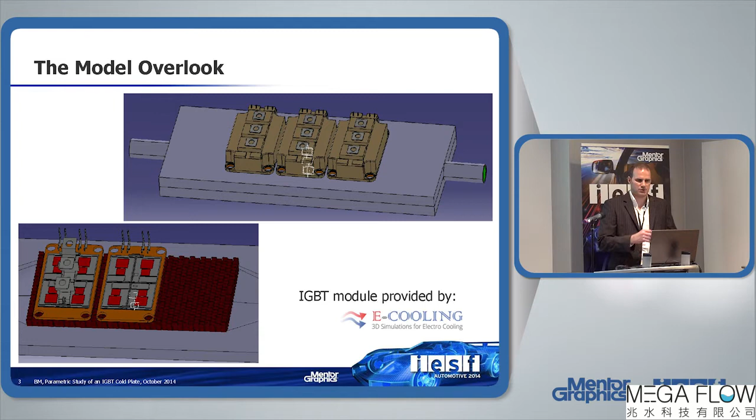These are the fins of the cooling, which I will change in numbers and sizes. Just a quick look at how detailed the IGBTs are. So we have the silicon, the solder, copper, ceramic plate, another copper layer, solder or TIM material, the base plate, and then a small thermal resistance as a TIM material to the cold plate.

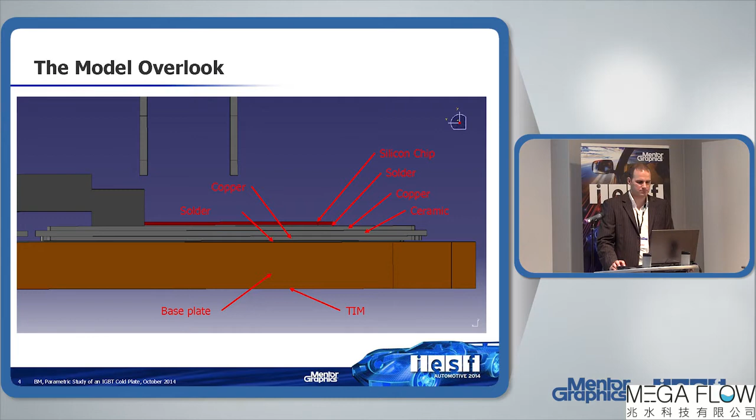So we start with the triple IGBT module on the cold plate. We can change the fins and pins in shape and size. The cold plate is just simple aluminum. You can change the material if you like, but that's just for the demo, as well as it's just water as a coolant, so no special coolant liquid.

The IGBT chips altogether have 690 watts, so 3 of them with each 4 chips, so per chip it's about 57.5 watts. For the diodes, it's 480 watts, or 40 watts per chip.

The IGBT module consists of various materials, as you've seen in the structure. I only use the local mesh for refining the region where the fins and pins are in the cold plate, as well as for the IGBTs, in order to get a slightly finer mesh on the structure of the IGBT.

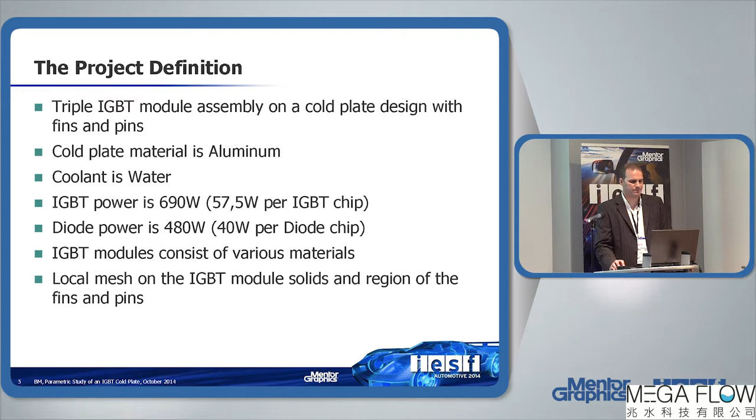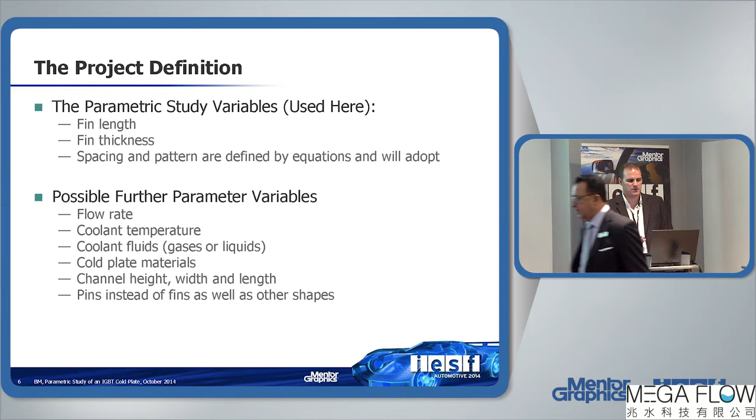In this parametric study, I can basically change the fin length, the fin thickness, the spacing, and the pattern, which are defined by equations. So if my fin gets longer, I have to have a bigger distance between them. Otherwise, if it's very small, I can have one long one. It doesn't really matter — there's some kind of equation behind it that automatically rechanges that.

You can go into more detail and make it more advanced in the equation. I just put a factor in there so it gives a bit of a gap.

You can also change the flow rates, you can change the coolant temperature. For example, if you have a cold start or if you're driving for a long time, the coolant isn't 20 degrees at the inflow, it's something around 40 to 60.

You can change the fluid, of course, gases or liquids. You can cool it with air, though of course that's not as efficient. And the cold plate material, of course you could use copper, but then it's getting more expensive.

The channel height — the width is about the size of the IGBT, so it doesn't really matter if you make it any bigger. But the height matters, to get more water through or to squeeze it for higher velocity through the channel.

The width, the length, the pins instead of the fins — in my study I just used the fins. I can simply switch by activating or deactivating the other part, and then run the same amount of variations there. You'll see it in a second.

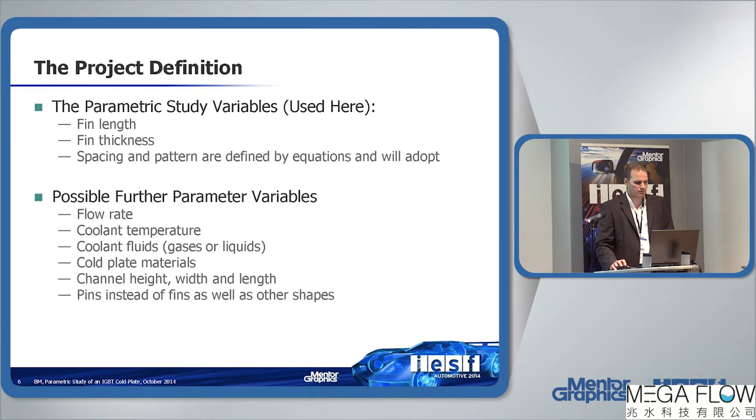They're both linked to one parameter, so if I change that parameter, both will change in size and also in distribution. And of course, you can also use other shapes than pins and fins — you can have ovals or whatever.

For the setup, the model setup took me less than 50 minutes. It was more like hiding the components so I could get to the layers in the IGBT to apply the material, or finding them in the tree of Catia.

And that's basically it. For the parametric study, I simply define which values to change, and then it runs through all these values, automatically creating all the projects that are possible — all the combinations.

So the mesh size for the finest fin model was about 2.5 million cells, and it took me about 9.5 minutes to mesh the model. The one for the coarsest fins, with a much larger distance between the fins, was just about 600,000 cells with 1 minute 15 seconds to mesh.

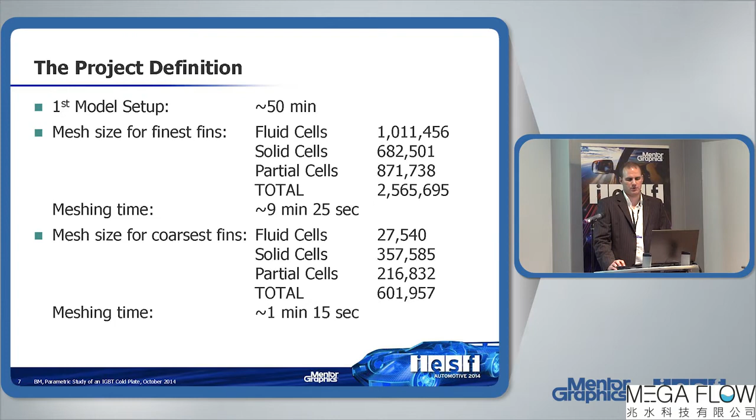And that's the important part. The meshing technology is a Cartesian mesh, for those of you who don't know it. With a Cartesian mesh, you would think you get stair steps in the geometry if it gets too complicated, but here comes the immersed boundary layer into play. So if I have anything angled, with a fillet, or more complex, you have partial cells which are part solid, part fluid.

So this is the fluid area, the area where the flow enters here. You see here one fin, there's another fin, and that's the aluminum casing of my cold plate.

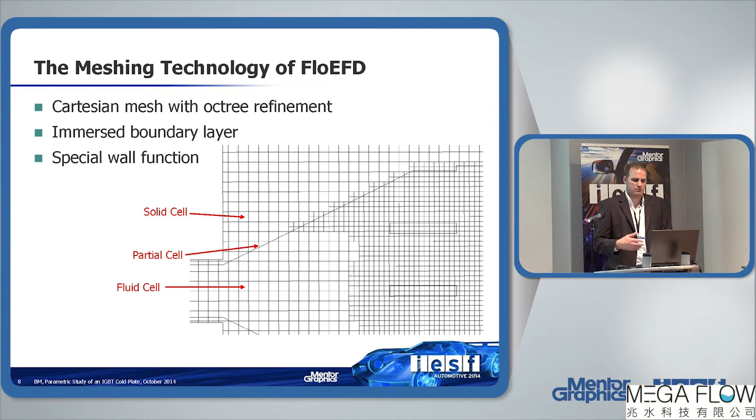We also apply a special wall function, because you probably noticed there's a very rough cell size. If you know traditional CFD meshing tools, you resolve the boundary layer that way. So we have a special wall function that takes into account whether we resolve the boundary layer with the mesh or not. If we resolve it, we calculate it directly. If we don't resolve it, we have a wall function for that. The boundary layer model is pretty much detailed and researched, so you can apply certain equations to work with heat transfer, friction, and so on.

Let me get to the demo. So this is my model. You can see we have the IGBTs on top, so I'm going to hide them.

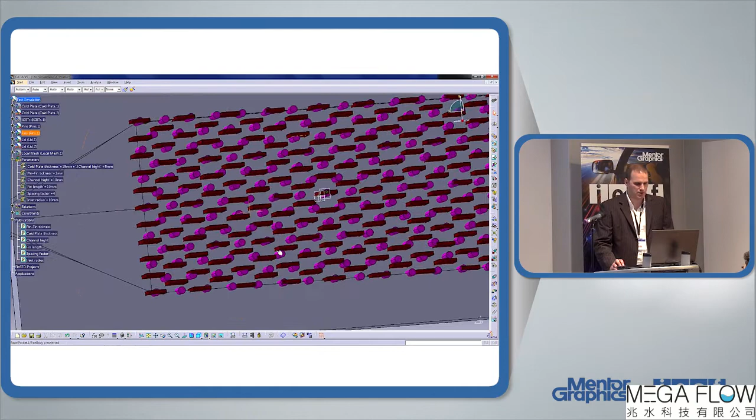This is the top part of my IGBT cooler, and this is the lower part. You can see here both of them are still shown, so you can see the pins as well as the fins. They're two separate parts, so I can activate or deactivate them with the parameters.

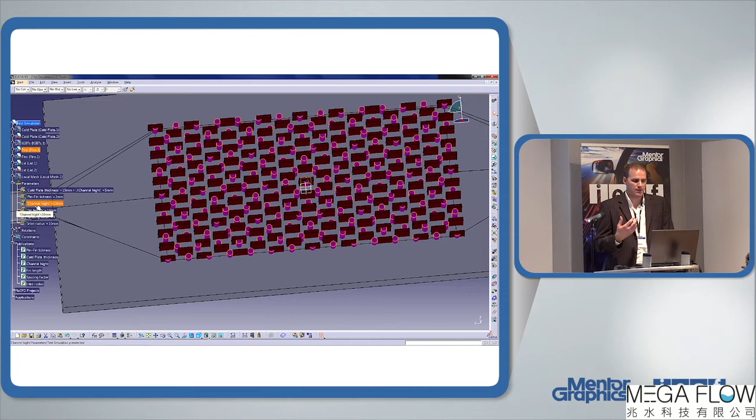Now I have a set of parameters here which Catia can provide. I'm not that familiar with NX and ProEngineer, we have colleagues who are much better with that, but you can probably define similar tasks there. These parameters are in the main product, and I made them public in order to access and change them, so all the parts which are in some way related to this parameter are linked to that.

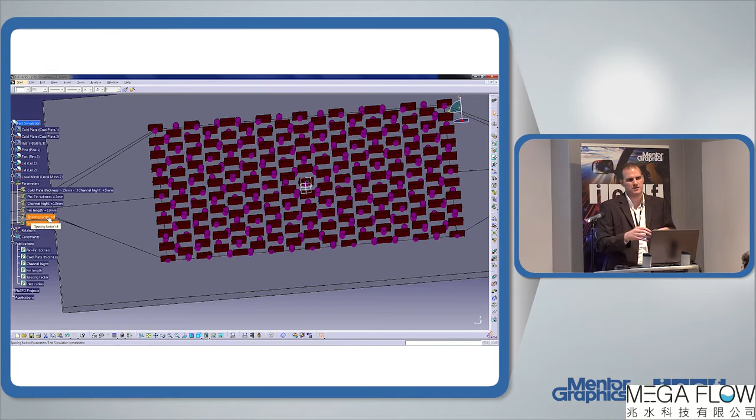So in an equation, if it says 2 times the fin size, it will use the parameter. If I change it here, for example the fin length, it only affects the fins now, because the other ones are radius or round. So let's do, instead of 10, let's make it 20 millimeters. It gets red, so I have to update the geometry, and you can see it automatically changes.

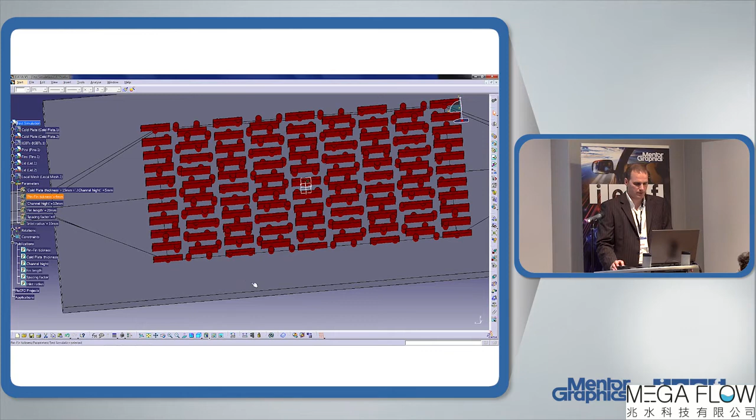If I change the thickness from 2 millimeters to, let's say, 4, you'll see that the pins also change, because they refer to the thickness as their radius. So of course a 4 millimeter radius would be an 8 millimeter diameter then. Update, now both are red, so we update it again, and we'll see how the pattern automatically changes.

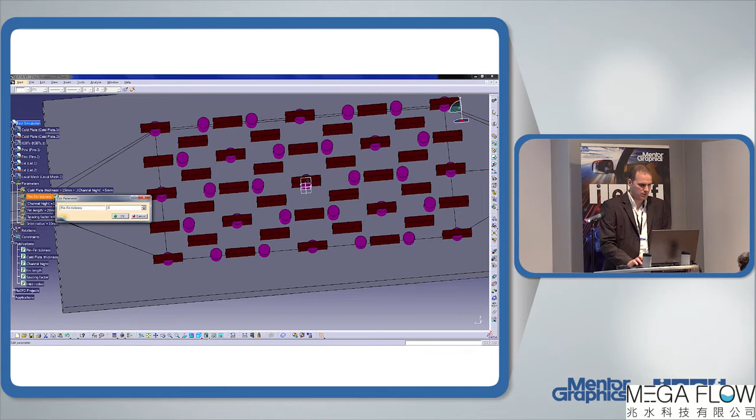It really goes only from that edge to that edge, and from these boundary areas here to the other ones. Depending on what I set, the shapes and the amount of fins I create will change. The finest one was 1 millimeter, and for the length we had 5 millimeters. So if I update that, you'll see it's very, very fine. You'll see later in the results how that behaves on the flow, on the temperatures, and so on.

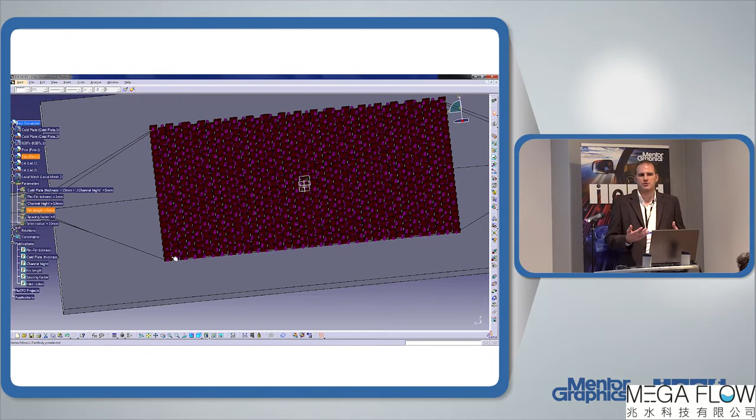So with this, you can basically reproduce any geometry. You can change anything, create a kind of porous matrix. There are some mixers with diagonals, rods relative to each other. You can place these things, and if you place it once, you can pattern it. You can change the dimension of the diameter of these rods, and this way you can really create your own structure as you like it.

Now these parameters are basically what I'm going to change. So let me switch to another project where I already have that defined.

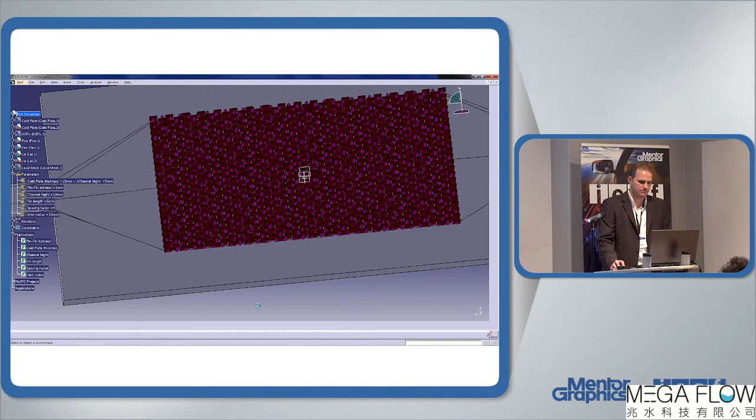Here. So this, you can see, is the same assembly. In this case, I deactivated the pins, so you can see a small bracket here that tells Catia that the component is deactivated.

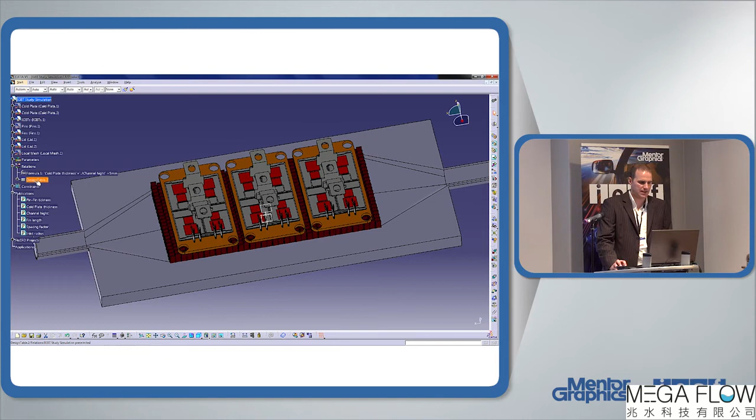I included here a design table. In this design table, I referred to the parameters that I might be able to change, so this design table I can control from the parametric study. Now, in this case, I cannot control the parameters here anymore because they're fixed by the design table. I would have to go into the design table and change it there. That's why I showed it before, where I can still easily change them.

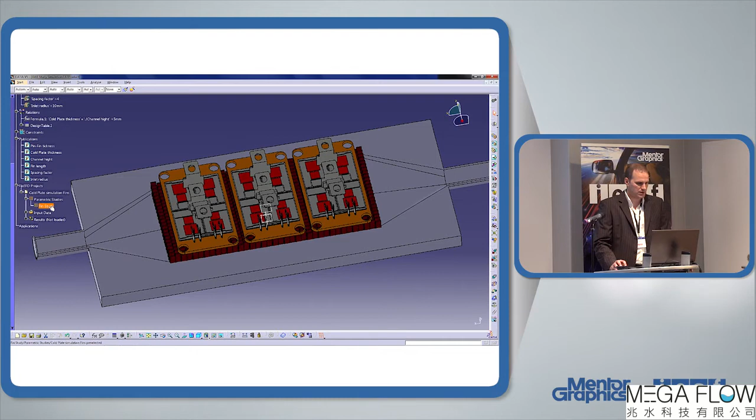So the parametric study is here in my project. You can see your parametric studies, and I named it fin study. So let's go in here.

Here you can see several of the parameters. You have the fin length, you have the component activation state for the pins. No, that's the fins, not the pins. It's just a Boolean value: 1 is active, 0 is deactivated. So that's why the pins are not shown.

You have the pin or fin thickness, the diameter or the thickness of the fins. And for example, I can also change the volume flow rate. Or if I like, just add another parameter for the volumes, let's say boundary condition, inlet volume flow, temperature.

Click OK, and I have a temperature in here too. And I can change, for example, the temperature, make that from 20 to 60 Celsius for the inlet in, let's say, 5 Celsius steps. Okay, you see automatically it creates all these combinations.

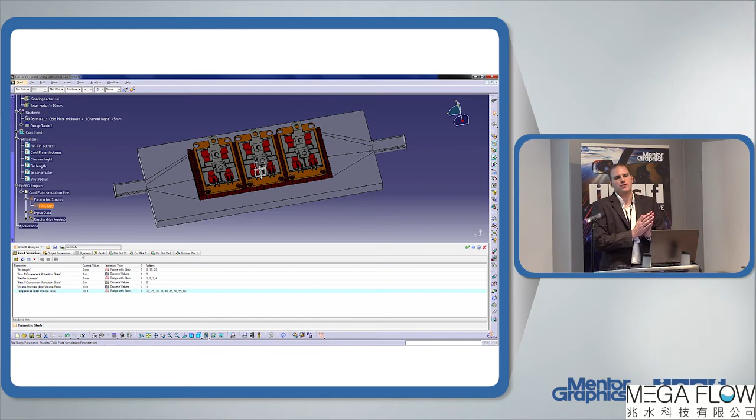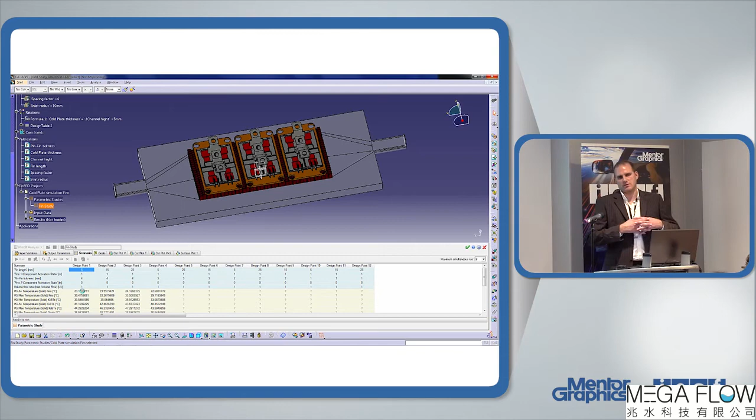As soon as I click on scenario, it will create all these - I have to update that. You will see how the bar slides down because it creates more and more combinations. Here you see all the parameters that I have chosen, and they will add another one for the temperature.

And the more you create, of course, the larger gets the matrix. And now we have, I think, like 6 parameters: 3 for the length, 4 for the diameter, plus again 5 or 6 for the temperatures. So it's a huge matrix that it's now creating.

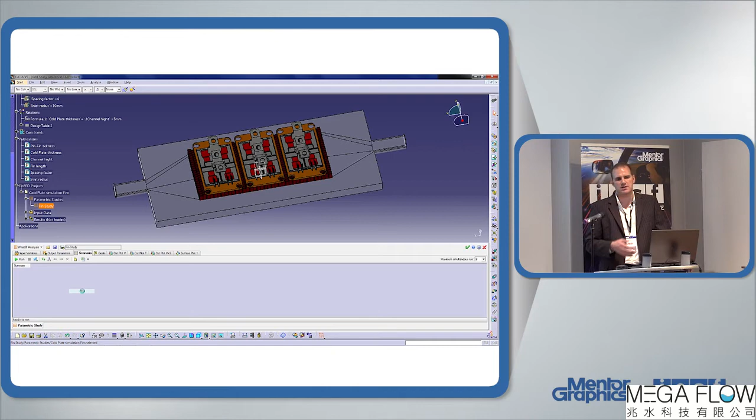But as long as I have enough time, or if the model is small enough, I can still run it just in series. Or if I have enough solver licenses, I can run them also in parallel, if I have enough computers to just distribute it on.

Here's my matrix, and you can see it's really huge. It goes up to 108 design points.

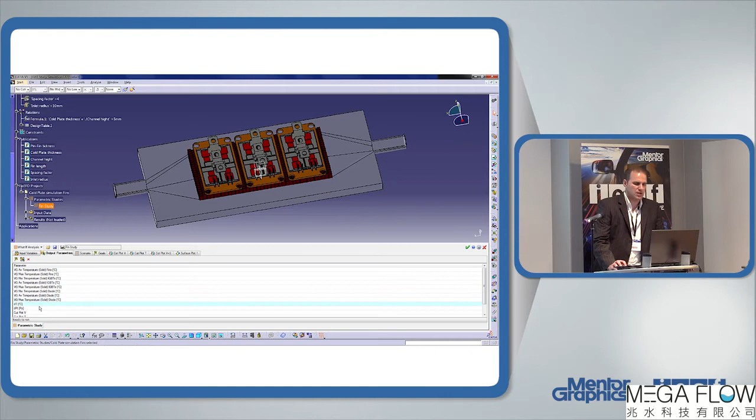So other parameters that I want to know are, for example, my goals, such as the solid temperature for average and maximum of my fins, the IGBT minimum, average, maximum, as well as for the diode min, max, and average. I have my delta temperature from inlet to outlet, as well as delta total pressure. So I know exactly what pressure loss I have.

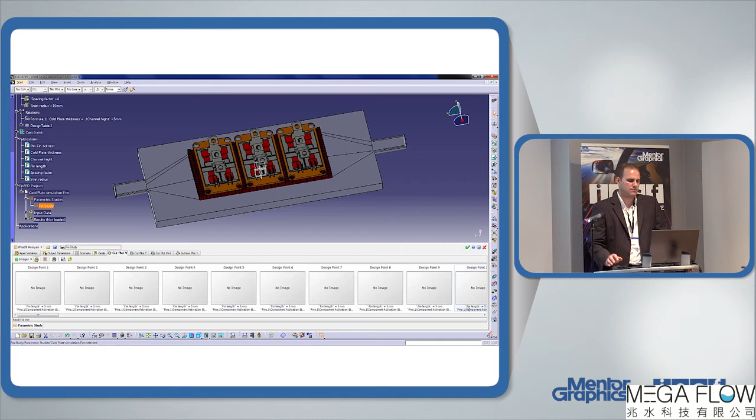I can also add some post-processing plots, which I already have defined in advance, so which layer and so on. And if I go to the plots, it will update the images as I calculate. The same goes for the surface plot, or in case of my goals, it takes a second.

You will see for each of these goals, I can change them into a chart where I have bar charts. You can see how they compare to each other, if it's higher or lower. And of course, I can also export it to Excel and work from there in more detailed graphs and so on.

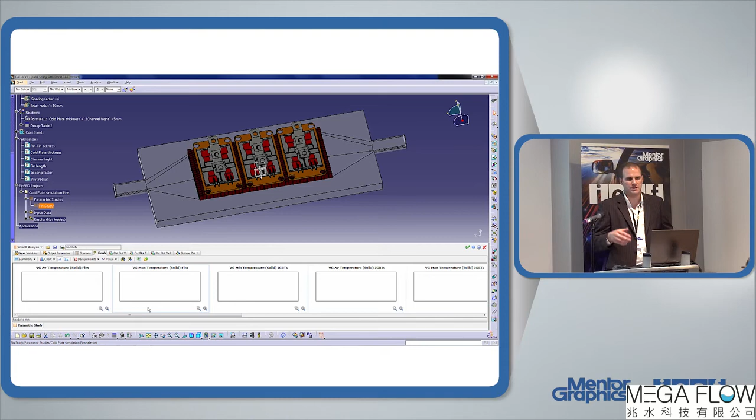So at this point, I would basically say, okay, that's my scenario. I can run it, or also allocate different computers to each scenario, and then just start the calculation.

If someone uses FlowMaster here, you can also use this basically as characterization of my cold plate. If you have a fixed cold plate and want to drive different temperatures and volume flow rates, you can use it in order to characterize it and put it into a full cooling loop in a car or airplane or wherever you want to apply it for valves, pumps, or whatever.

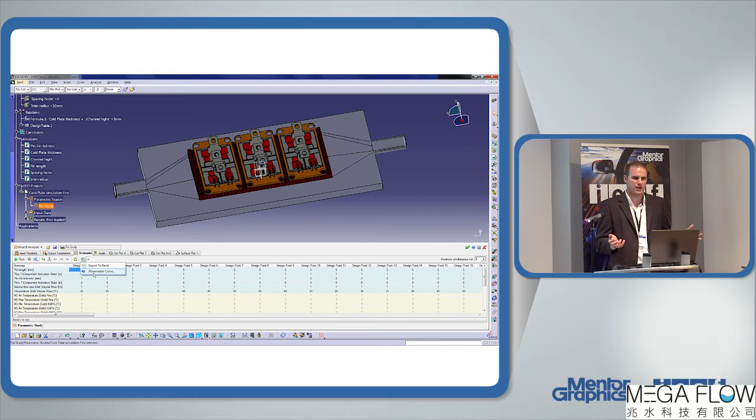This way, you get kind of a characterization of a 3D component which you can plug into one system simulation and run through all the variations in temperatures. Depending on how the system behaves, it takes the actual parameter of the component in the system simulation.

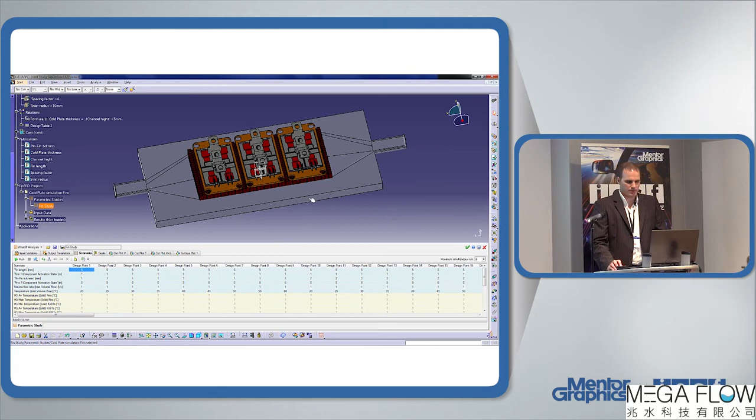Okay, so done with that. Now let's have a look at the results that I created, not for this huge model.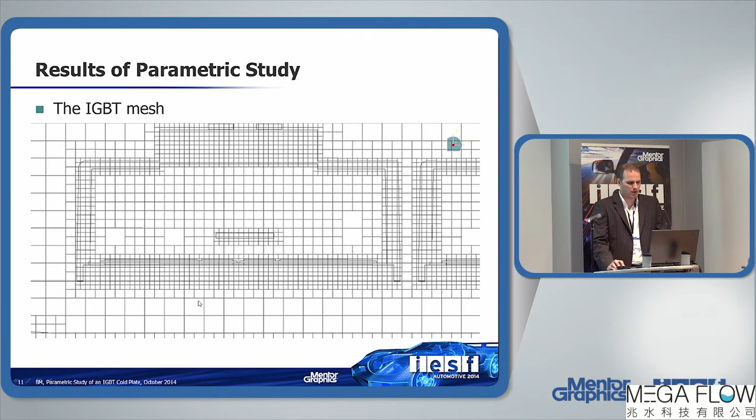This is my IGBT mesh. You can see here's part of the fluid in here as well as around it. And if I zoom in this area, you can see the structure of the mesh. You have here, that's a copper layer, as well as this one.

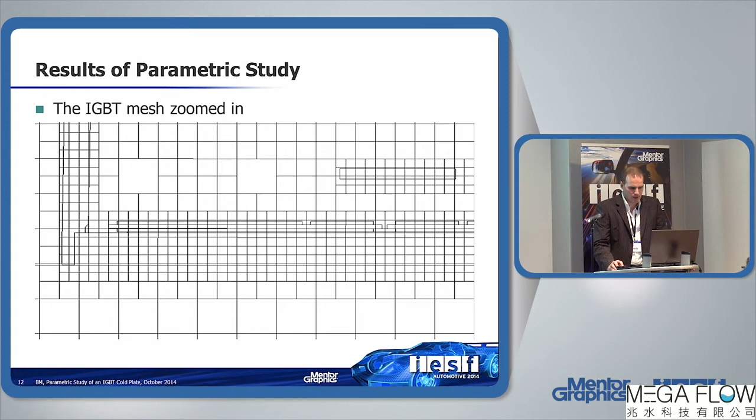The IGBT chip here in that case is in a plane further behind, so you don't see the IGBT chip, but you can see the ceramics here, another copper layer, and a very thin solder or tin material.

You don't really have to resolve the thickness because the partial cell takes into account several layers of materials, different materials, and since it's linear behavior of heat conduction, why do you need to resolve it in that detail? It's just linear, there's no reason for that. Of course, if there's a heat source in the center, it behaves differently, but it's mathematically describable.

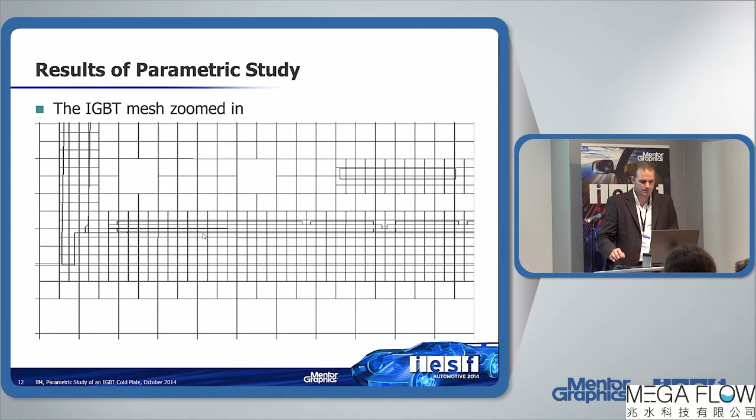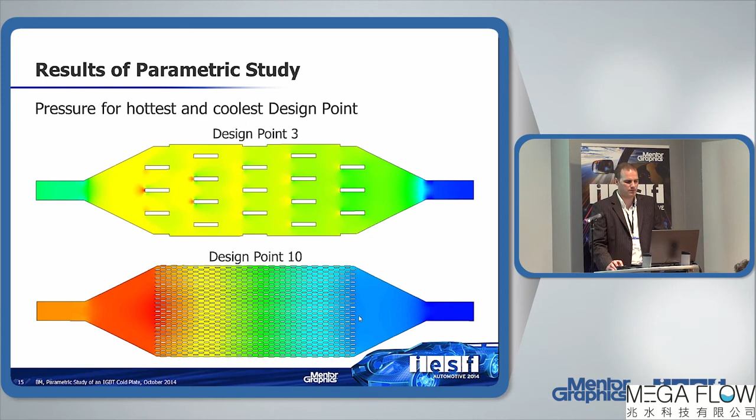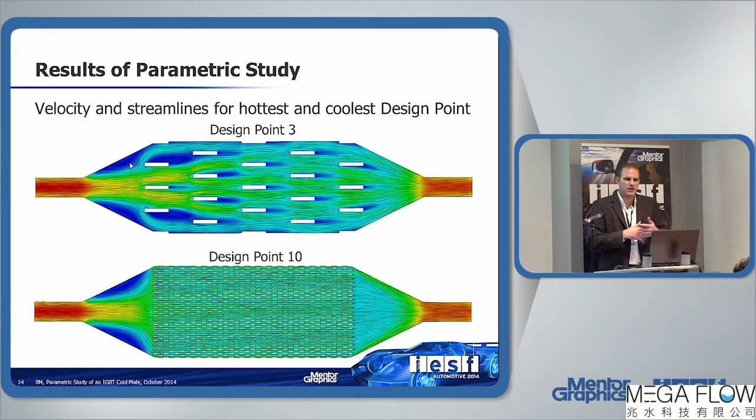Here's another one with some streamlines. Or if we want to go into the pressure, you can see the stagnation pressure on the tips, or how it stagnates in front of all the fins and then reduces slowly over the length of that. Of course, there's some improvement you can make at this point, as well as if you go back to the velocity in this area here, where you have recirculation, you can optimize it, make the expansion not so hard but more slow, or make a fillet in there.

So a lot of optimization you can also do there. That's just a very simple example, so I'm not a perfect designer in that way.

It's 1 liter per second, and the model, from the straight line, is 20 centimeters and 1 centimeter thick, so it's really like flowing through in a second. So the temperatures here are very low—probably reaching up to 0.3 Celsius just by passing through from one side to the other.

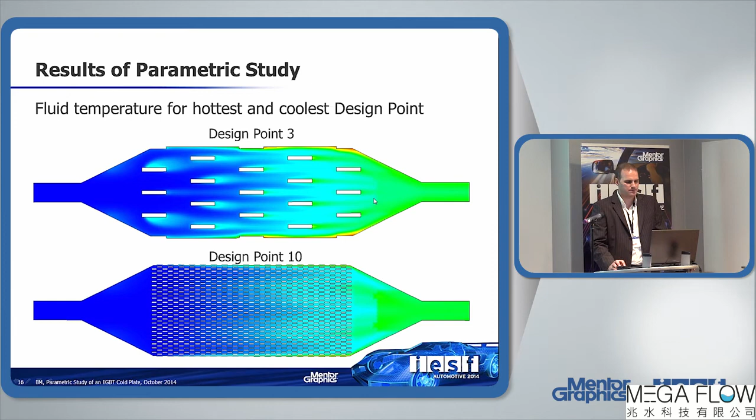But if we look at the IGBTs now, you can see that with the very coarse distribution of my fins, we have at the beginning where the temperature is low and speed is still high, some stagnation, and this IGBT is hotter also because it sits between the two, and therefore is kind of crowded from both sides and can heat up a little bit more.

The other one has a very good distribution of the fins, so good heat conduction into the whole assembly as well as into the fluid, better spread of the temperature, better distribution. In this left case, you would probably face some earlier failure in the center IGBT compared to the left and right one, while in the other case they're all equally well loaded with temperature.

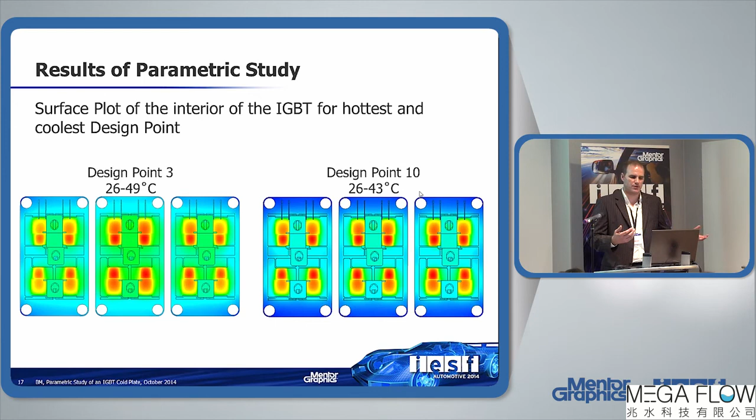And it's not much colder, just 6 degrees Celsius colder. You can optimize it, as I said, with flow rates. You can also apply a pump curve at the beginning in order to make it more realistic to a pump that you'd have in front of it, so the pressure changes, the volume flow rate changes, and so on.

Now this plot I have to explain a little bit more. We have normalized values going from 0 to 1, with 1 being the highest. At the beginning we have the fin length—that's 5, we have 15 in the center and 25 on the outer. I didn't change more because we just create more and more projects.

The second one is the pin fin thickness—1 millimeter, 2 millimeter, 3, and 4. I colored the lines according to the pin fin thickness, and dashed and dotted them according to the fin length. So if we go to the lowest one, they all start dotted, the next ones are dashed, and the higher ones are straight, solid lines.

The other ones you can see are all green or all blue from the leaving point. But what you can see from that is how they influence the IGBT average maximum or diode average maximum temperature, as well as the pressure loss in the model.

You can see that it's kept almost constant for the IGBT and diode temperatures normalized.

If we go from green, blue, purple to red, from the size and dimension, from very thick to thin, you can see that the thickest ones don't have good spacing because they would get very thick, so the spacing is wider. We have larger gaps, so the cooling is not so good and the temperature is much higher.

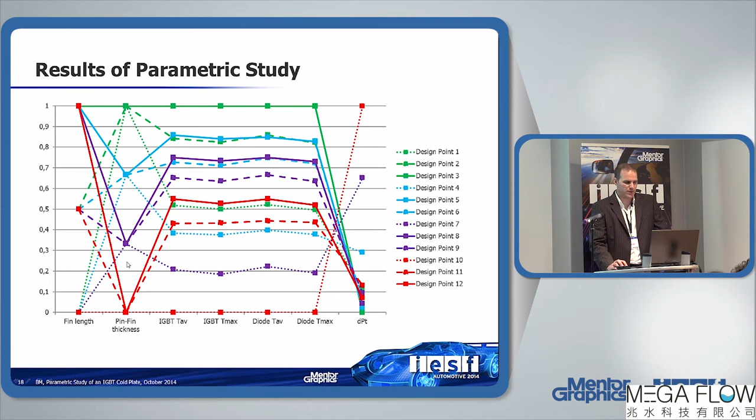If, for example, my pump only works in a certain range, or the whole system can cope with a certain pressure loss and no more, I can say the purple one here with the dotted line works best. That's the 2 millimeter thickness and 5 millimeter length.

I can also add other parameters, like changing the volume flow rate, to find out if I really have to put such a high volume flow rate. Maybe a lower one will still be enough and I can save pump power, especially in electric vehicles where you want to save power.

So here you can play with the parameters and try to find the optimum way of doing that.

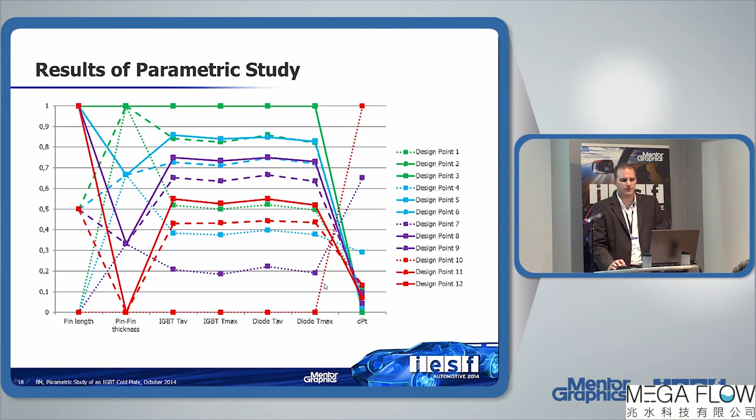So what we learned from all of that is the CAD-embedded approach that we do with FloEFD. It makes it very easy to work on the CAD model and change all the parameters. That's usually not that easy with traditional CFD tools, especially if the geometry changes completely.

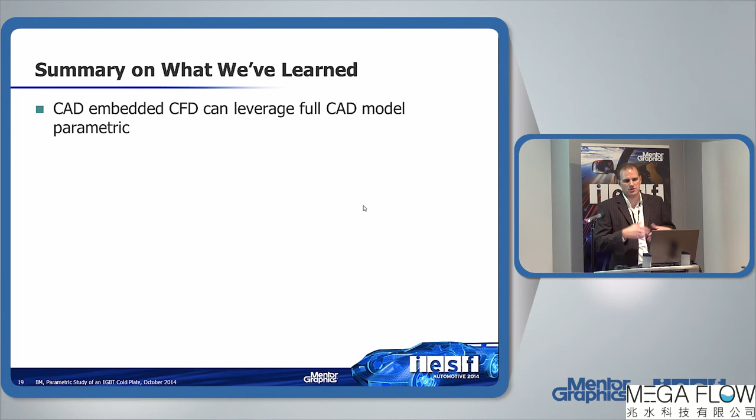You have to remesh it manually often to get a good mesh, or you can't even get to the parameters. You might be able to change the mesh by stretching it longer, but you're not able to change a round mesh to a square mesh that way. Here I can just change the dimension, the shape, and everything, and simply rerun it in the next parametric iteration.

The Cartesian mesh is ideal for automatic meshing. First, it's very robust for the solver, and the immersed boundary layer model we use with our partial cell technology makes it able to automatically mesh most complex geometry.

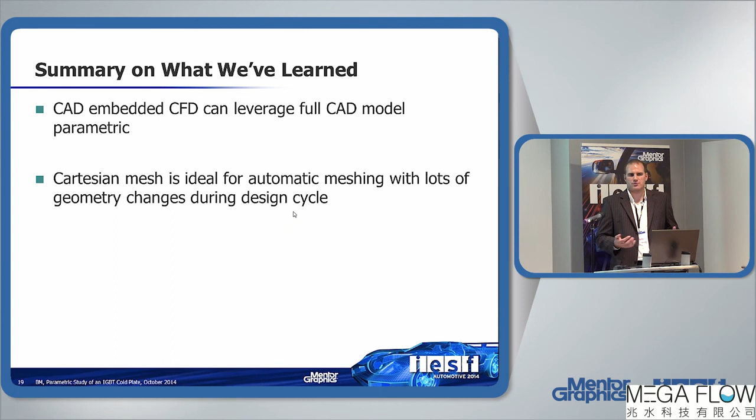So it doesn't matter how the geometry looks - you've seen it round, long, stretched, or closer together. We just have to define a certain region over that area and say, try to fill a certain amount of cells within the gaps between two fins, and it will do that.

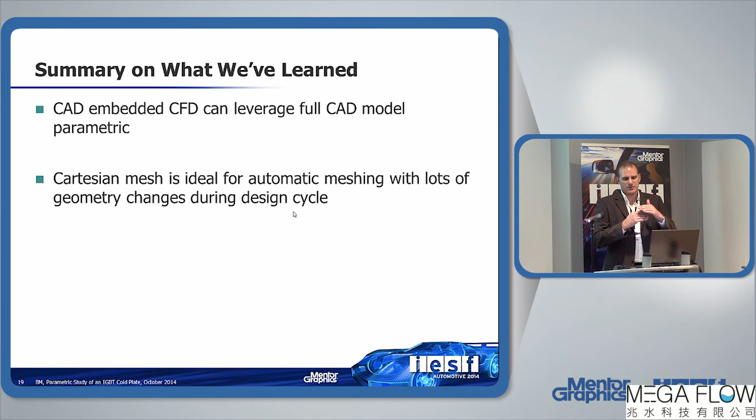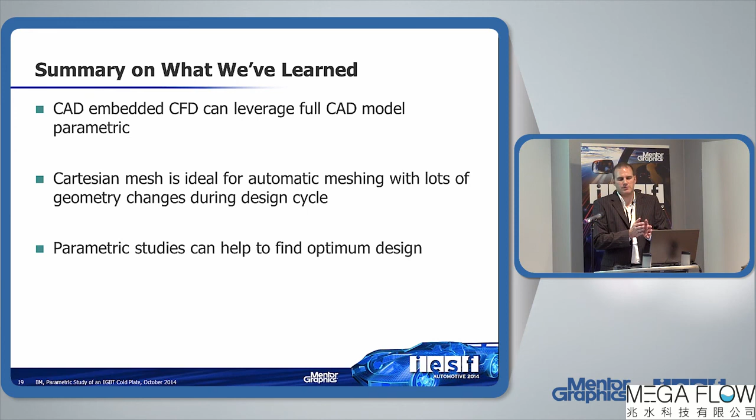The parametric study can then also help find the optimum design - not the ideal, the perfect design. For that you have to define much finer steps in order to find maximum values. You just define discrete values to jump from one to the other, but the perfect design might be in between. That's where the next step would come in.

You really use an optimization tool, algorithms, to control that. You check for the temperature, raise it a little, it gets colder again, maybe in between. So the optimizer really has some algorithm for evolving different configurations, like ant farm kind of behavior or evolutionary behavior, and that can change your design.

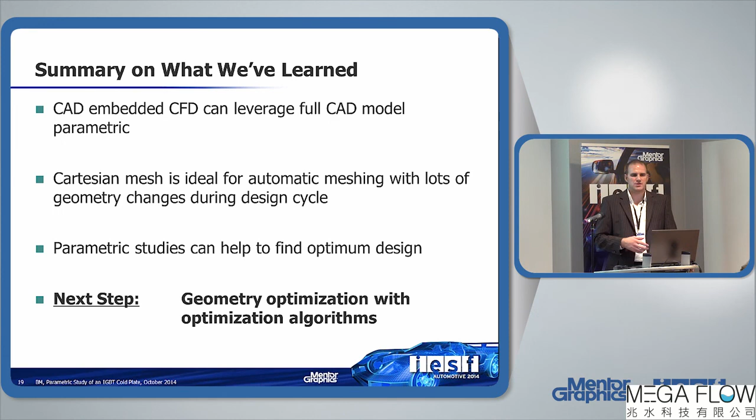You can manipulate Excel parameters for the CAD model, or even interface into the CAD model depending on the CAD system you use, as well as log into our API from FloEFD. For example, you can use that already with modeFRONTIER - we have a direct interface where you can link into our API to control these parameters and change them the way you like, or to optimize that.